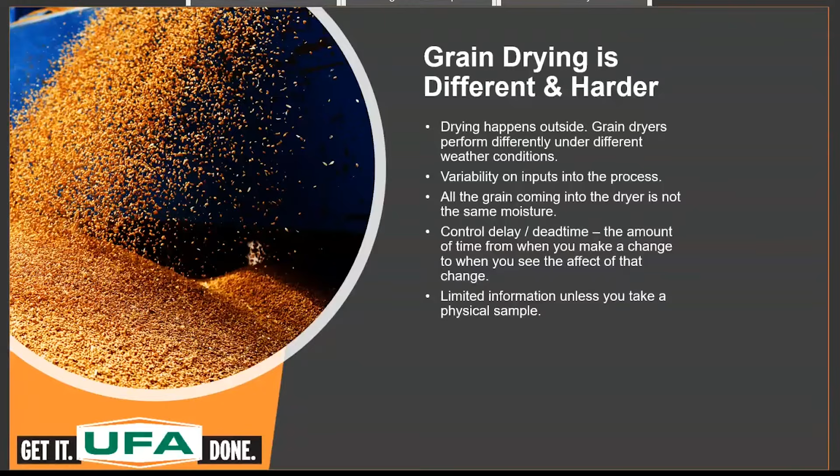So I'm going to assume that the DM510 can handle taking care of some of those hurdles. What are some of the benefits of having a DM510 on your dryer? Exactly. That's really how Dryer Master was developed, was to solve that problem. So there's really three key things.

First thing is information. You make better decisions if you have better information. So what we have is real-time moisture information. If you think about how you would run a dryer without moisture information, the only way you're going to know is if you go and take a sample, and then all you know is what that sample is at that moment. The two hours from when you did the last sample, you really don't know what happened.

The example I use is one of our IT guys was out in the country one night driving, and his dashboard lights went out, so he couldn't see what speed he was going at. He's driving along, not knowing if he's going fast or slow, other than kind of by feel. So he'd turn on the inside light in his car for a bit to see what speed he was going, and then he'd turn that off because he didn't want to be driving with that on all the time. That's kind of like having an instantaneous view of what his speed was, but then until he turned on the light again, he didn't know what speed he was going at.

And so with Dryer Master, we give you that real-time moisture information at the inlet and the outlet of the dryer. The next thing is, if you think about when you're grain drying, you've got to figure out what speed to run the dryer at.

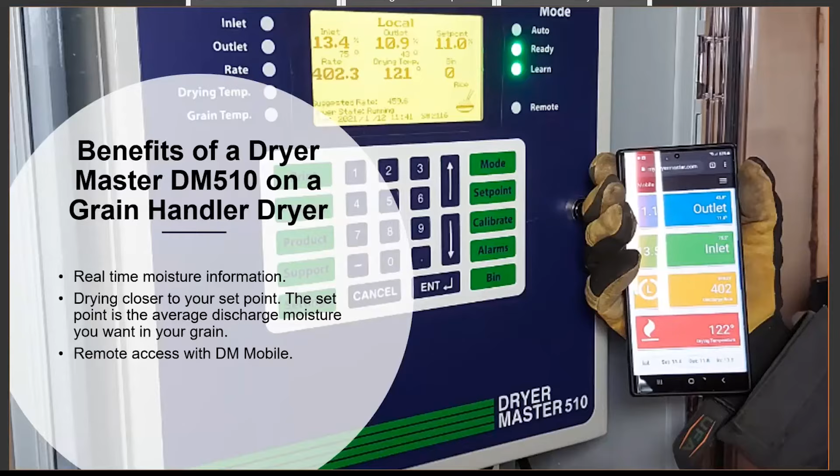So with all that, can you explain how a DM510 works so well at controlling a grain dryer to achieve average moisture content? Okay, so if you think about, let's say you don't have anything on the dryer other than you're going to do manual control. Ideally, what would you like to have if you're going to make a good decision?

Well, if you think about it, I'd like to know what's in the dryer, what moistures are in the dryer, and where they are in the dryer - how much is in the hot zone, how much is in the cold zone, etc. And I'd like to know how the dryer is drying, because if I have all that information and a calculator, I could probably work out the approximate speed I should be running at for the grain that's in the dryer. So what the Dryer Master does is it's automating that.

So we put a moisture sensor at the top of the dryer, so we know what's going into the process.

We have a moisture sensor at the bottom of the dryer, so we know what's coming out. We feed that information to the control panel, which is essentially a computer that does calculations and figures out how the dryer is drying based on what comes in and how it comes out. That teaches us how the dryer is drying at this point in time, and then we can figure out the best speed to run at for the mix of grain that's in the dryer.

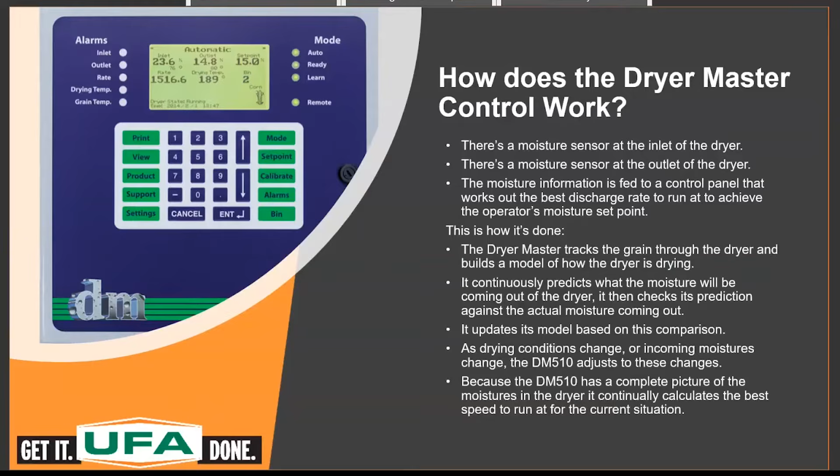So how does controlling a mixed flow dryer like a grain handler differ from a cross flow dryer?

Okay, so this is kind of a fun one. It ties in with what I said before about Dryer Master — it doesn't really matter what kind of dryer it is, but the drying problems, issues, or complexities change with different dryers.

With a cross flow dryer, you've typically got a shorter retention time, so the grain's going through the dryer faster, which usually means you're going to see more variation at the outlet of the dryer. But if you make a change to the discharge rate or the drying temperature, you're going to see the result more quickly because it's a faster process. But you have to make faster control changes.

With a mixed flow dryer, you've got a longer retention time, so it's naturally going to reduce the variation coming out of the dryer. But because it's in there longer, if you do have to make a change, it's going to take longer to see the effect of that change. So you have to be looking much further ahead before you make a change. Each of them has their own intricacies.

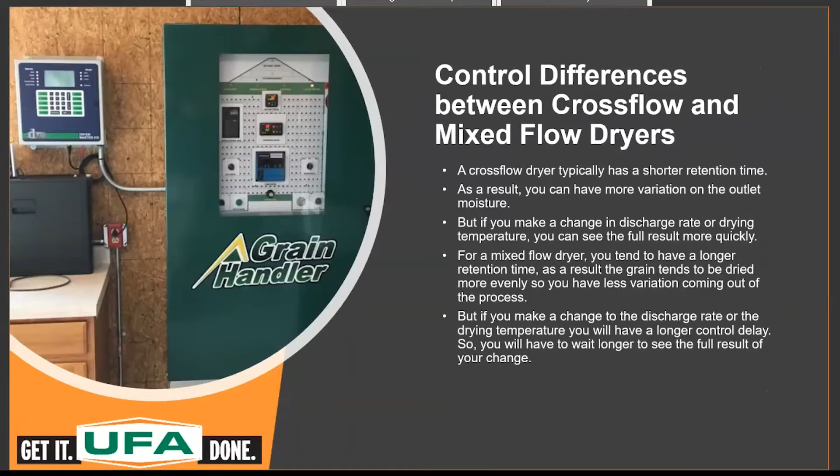So the longer retention time ends up giving you a more consistent output, is what you're saying. Yeah, that's typically what happens — you'll see a lot less variation on the outlet with the same kind of inputs.

Good. So obviously, over-drying your grain costs you both in grain weight and energy costs. Can you explain how the DM510 can help overcome this?

Yeah, so the major financial benefit most of our customers find is because they have more information and something watching their dryer all the time, they can be a little more aggressive on their set point. Let's say the elevator takes wheat in at 14.5%. Ideally, you want to be delivering 14.5%. But at the same time, you don't want anything going into your bins that's too wet without knowing about it, because that can get you into other kinds of trouble. Now that you've got more information and you're more accurate on your average, you should be able to deliver closer to what the elevator takes.

So for example, if you only deliver 14% and the elevator is paying for 14.5%, you've lost 0.5%. On $8 a bushel of wheat, on 100,000 bushels, you're talking $4,000. That's the money you don't really want to give away — because essentially, though we don't usually say this, you're not selling enough water.

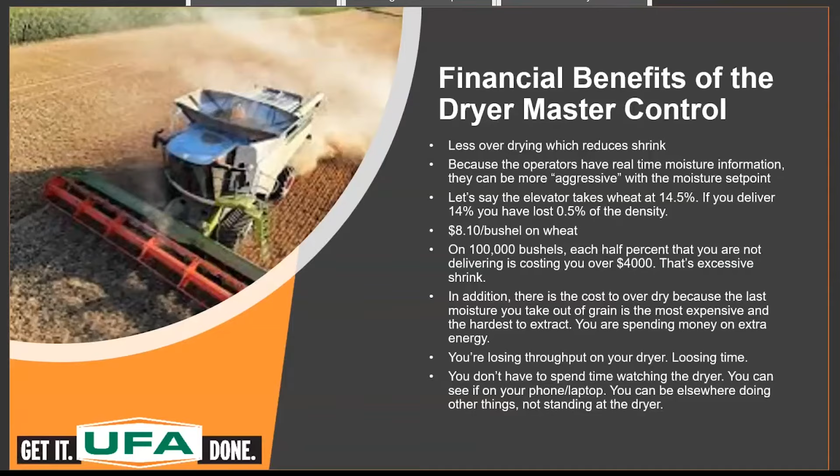So what are some grain drying tips that you've learned over your many years of experience in the grain drying industry?

Yeah, I think there's a few key ones, and this has come a lot of times from our customers telling us things. The first one is interesting: you talked in a previous webinar about having 2 wet tanks if possible. Not everybody can do that, but besides the benefit of being able to switch products, we had a customer in the US who experimented with 2 wet tanks, receiving into one and drying out of the other. They found that by tempering the grain, letting it sit for a few hours after harvest, it dried better and they saved about 10 to 15% on energy cost. This was corn in the US, so I can't say for sure it's the same with wheat, but the concept holds: if the grain can temper a bit, it tends to dry faster, so you spend less money and less time in the dryer.

The other thing that's really important, especially with any dryer, is the longer runs you can do, the better. You really don't want to be stopping and starting, because you're heating up the grain, then it cools down, then you heat it up again, and it's hard to have consistent quality if you're always doing that. For example, if you've got 6 hours worth of drying today and 6 hours tomorrow, you're much better off putting those together and having 12 hours. You see much better results, and we've seen this over and over with customers—longer run times work much, much better.

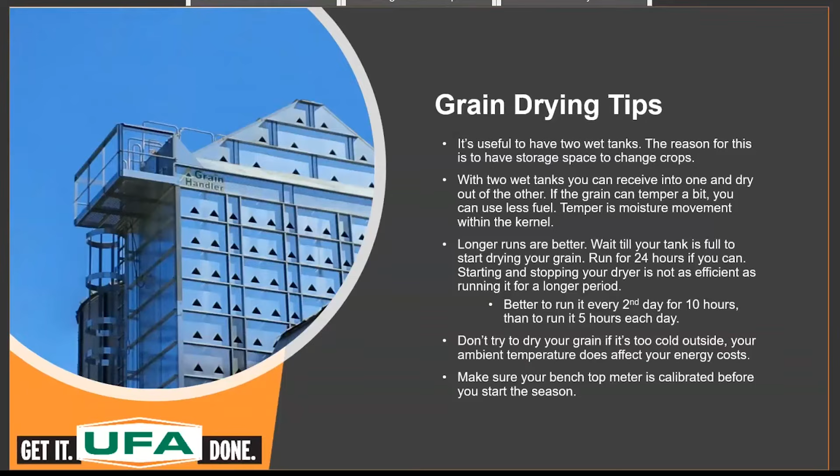So can you tell us where the moisture sensor should be located and any other requirements to make sure you're getting an accurate moisture reading?

Sure. So like I said, there are two moisture sensors. The inlet moisture sensor we want to place just basically at the top of the hot zone of the dryer. The idea with both our moisture sensors is we're trying to mimic the conditions in your benchtop tester. Now, your benchtop tester just sits on a desk—you put a small sample in and it takes a moisture reading. We're trying to do that with moving grain, so ideally we want it compacted and not flowing too fast. So the inlet goes just above the hot zone area of the dryer, and the outlet after it comes out of the dryer. At Dryer Master, we've come up with what we call rotary feed chutes—it has a paddle wheel that meters some of the product past the sensor slowly, at about 50 bushels an hour. That's kind of how we like it placed.

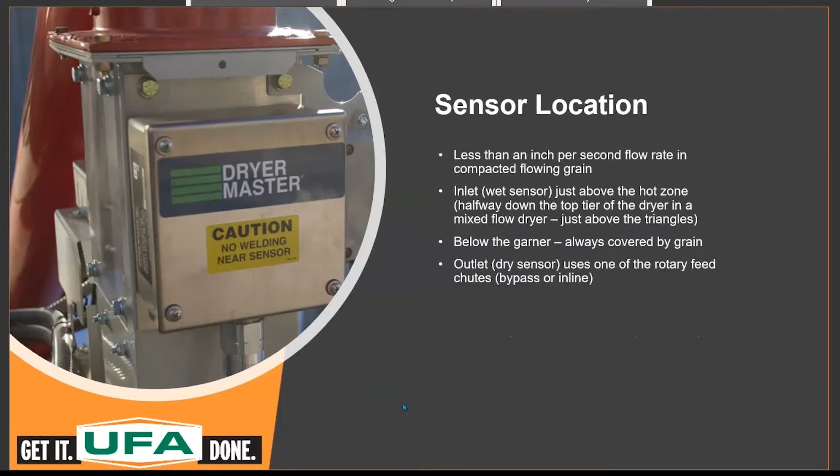So if we continue on, can you explain the calibration process for the DM510? Sure, Sam. This is a very important thing.

So like I said, we calibrate the Dryer Master sensor to your benchtop, but the inlet and outlet sensors are treated a little differently. The inlet sensor, most people aren't going to climb to the top of the dryer to sample it, so when we designed the system we said the inlet moisture doesn't have to be exact. What we want to know is how much it's changing by. So it's less important whether it's 22 or 21%, but if it moves from 22 to 21, we know it moved 1%. The change is what's important.

So we tell people the inlet, you really don't have to calibrate very often. Basically, if it's within a point or two, that's sufficient to give good control.

The outlet sensor is much more important, obviously, because that's the end of the process. If you see on the picture, there's a little green button next to where it says Dryer Master, and we tried to make the calibration process as standardized as possible. So you push that green button and it'll flash for 30 seconds.

What we want you to do is take a sample during that 30 seconds. We don't just want a quick coffee cup sample - we want enough that you're taking it over 30 seconds, because not every kernel coming out of the dryer is the same moisture. If you just take a little cup, you may or may not be getting a representative sample. So we're trying to average over 30 seconds, and with that averaging you're going to get a better result. Then you put your reading into the Dryer Master panel and it does the calibration.

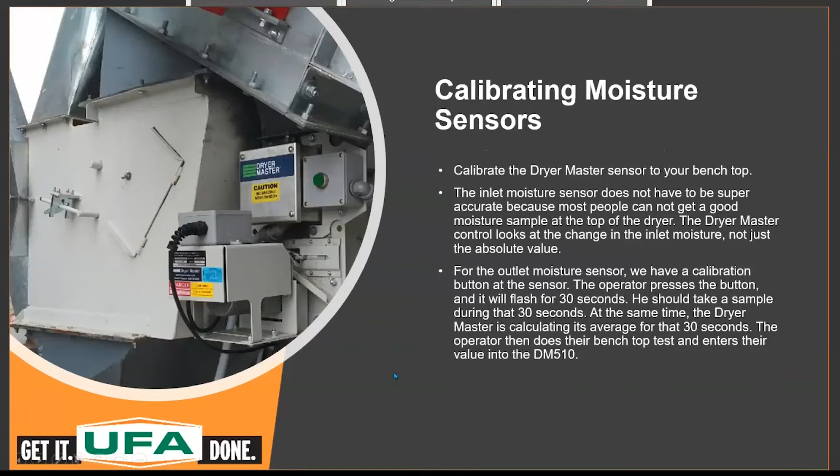Great, good explanation. So one of the big misconceptions is maximum moisture content versus average moisture content. Can you explain the differences between the two, and why it's so important?

Yeah, I think it's the next slide, Lena. I think we're flipping between slides here. Let's just go to the next slide and then we'll come back to this one. One back - oh, one back, sorry. Yeah, one forward.

Okay, so this is kind of interesting, because if you ask most operators what moisture they want coming out of the dryer, a lot of them are thinking in their mind of the maximum moisture they want, because you don't want any problems in your bin with stuff that's too wet. That's an obvious and smart thing to do if you don't know all the moisture coming out of your dryer. So if you don't have a real-time moisture sensor and you're only doing samples every couple of hours, you're going to be a lot more careful about how wet you want that grain to be.

So a lot of people have a maximum moisture - I don't want anything over this percent. Whereas the way Dryer Master works, and what we want the operator to think of in terms of a set point, is what's the average moisture that I want. On average, you're going to have the same amount above and below. So you'll have some wet grain, probably a little wetter than you might normally expect, but if you have some dry to balance it out, once it goes into the bin and equalizes, you'll be fine. That's one of the ways a lot of customers get to the point where they reduce the amount of shrink they have.

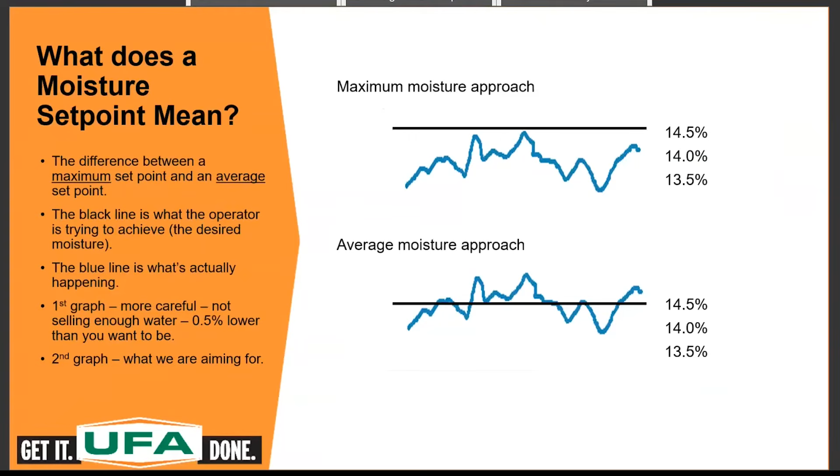Lena, if we go back to maybe the slide before, I think. Yeah. Ben, I'll just explain this one, I think.

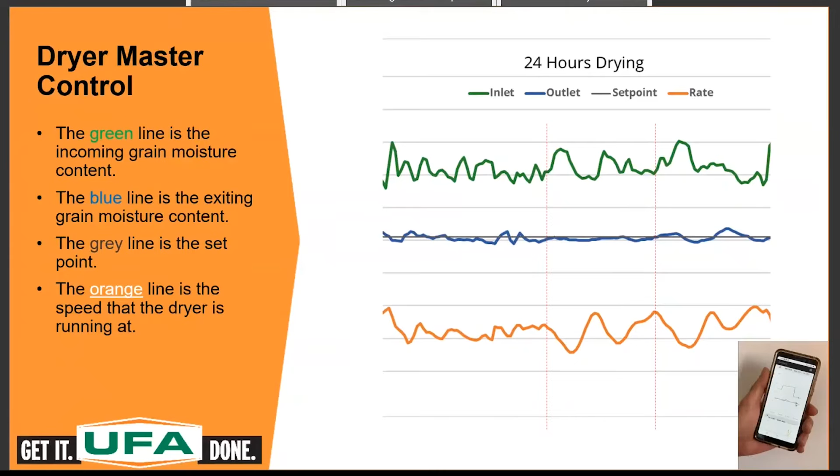So obviously the inlet sensor is a fairly integrated portion of the entire system.

Oh, definitely. Otherwise, you'll see this sometimes when operators are only working off the outlet sensor - you kind of get chasing your tail. Let's say you're targeting 14% moisture, and now you get some 13 coming out. You go, uh-oh, I better speed up. Well, you're reacting to what came out - you're not going to fix that 13. So they speed up the dryer, and then 2 hours later, it's coming out at 15.5 or something. They go, oops, too wet now, got to slow it down, and they start oscillating back and forth because they're doing what we call after-the-fact control.

So the idea is really the way Dryer Master does it - you want to do it at the beginning of the process. Earlier you stated one of the benefits of a DM510 is to allow you to remotely control your dryer. Can you show us how this works?

Yeah, so basically Dryer Master has what we call an app, but it's just browser based, and anybody can look at a little example we have running online, very similar to what you would see if you had a Dryer Master. You just have to get internet to the Dryer Master panel, wired internet to the panel.

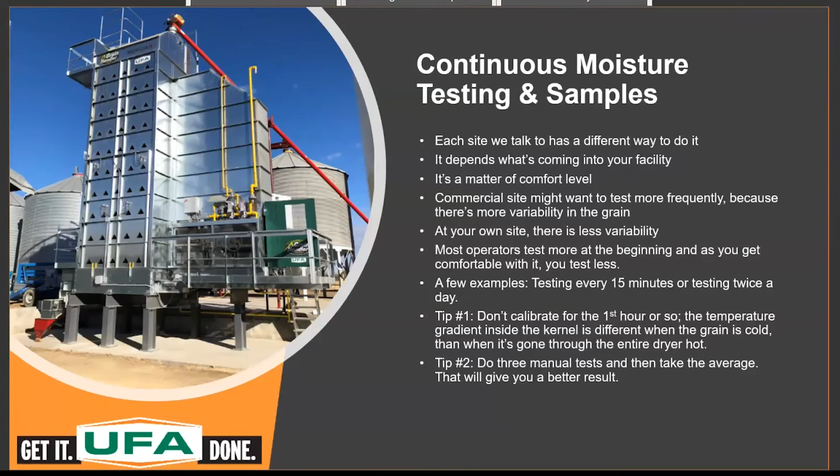Perfect. Well, I think we're on to the question period now.